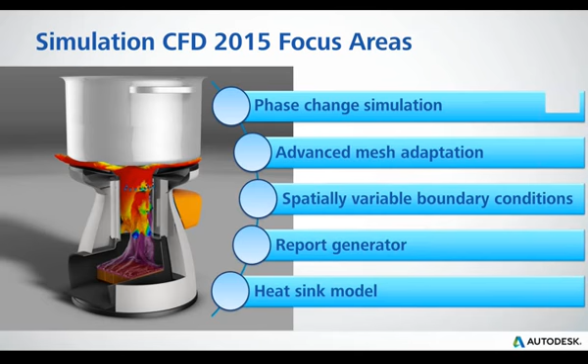Let's talk about phase change. Phase change is an extension, or one piece, of what I would call multi-phase. If you look at current 2014 capabilities, what we had was cavitation, humidity, steam, so the ability to do basically superheated steam, and free surface. We also had some extensions for particle tracking and erosion, but that was most of what we could do when it comes to multi-phase.

For Sim CFD 2015, what we added was the ability to do liquid-gas phase change simulation. That means the ability to take boiling, the effect of going from a subcooled liquid to a saturated vapor all the way to superheated in one analysis, with boiling, and take into account the different thermal and flow effects that phase change would have. We make it available for water, ammonia, R134A, and other common refrigerants, but it's adaptable so you can add your own custom blends if you have a refrigerant that's not in the stock database.

So the target applications we see are phase change, heat exchangers, and radiators. Basically anything where you have flow going through—I wouldn't consider anything like natural convection. You're actually forcing flow and using that refrigerant's high heat transfer capabilities while it's in a saturated vapor state to move heat off of a device. Those are the common applications.

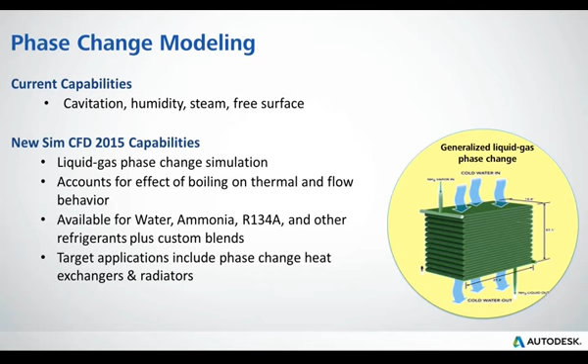So think about, from an electronic standpoint, IGBTs or other high-output electronics. You might have a cold plate and run a refrigerant through there; you're probably going to want it to stay in its saturated phase so it can have a really high amount of heat removal. That's really what this is designed for, to show you an accurate depiction of heat transfer and pressure drop.

So just another way to show what I just talked about, but what I like to say is that the physics are actually pretty complex. We're taking into account the nucleate boiling that happens between the walls of passages. There's some pretty sophisticated stuff going on, but it doesn't require a lot of setup knowledge from the user. It's really just flipping a switch and making sure you put the right reference properties of the material, like what pressure it's operating at.

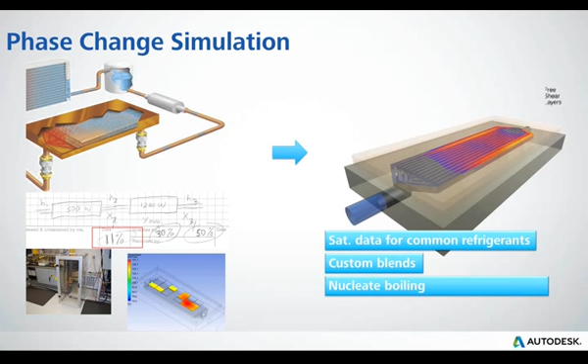For mesh adaptation, we included some new extensions, adding free shear layers, compressible shocks, and heat-producing parts. We've had mesh adaptation since 2013, and I think the way the user should really look at mesh adaptation is as an easy way to answer that age-old question: is my mesh good enough? Do I have enough mesh to be mesh independent? Is my answer, based on the inputs, independent of the mesh? That's what mesh adaptation is really built for, to get as accurate a solution as you can. The only other uncertainties you have then are: are my material properties right, and do I have the boundary conditions modeled correctly? The mesh should be kind of taken out of the equation at that point.

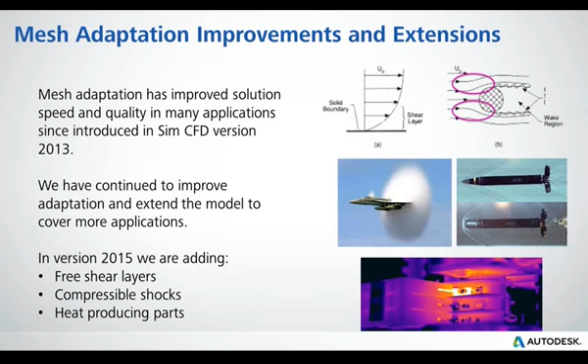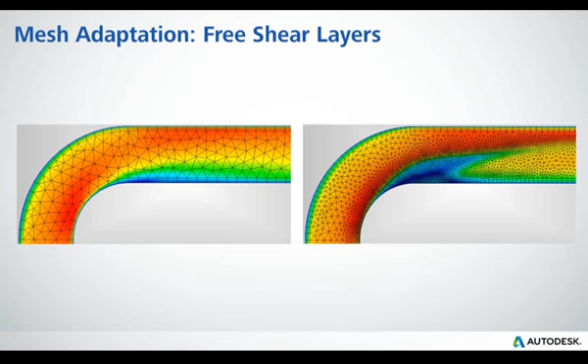So what does it look like? For free shear layers on the left, I like to use simple representations - on the left is just a pipe bend, and the transition from red to green is basically where the flow is separating and wanting to recirculate. On the right, after you go through mesh adaptation, you can see all the mesh concentrated, really capturing that separation accurately without any user intervention. The software is doing it for you, and it's not just going to overmesh the entire model. Mesh adaptation will add some mesh count, but it's going to add it where it's needed and not where it's not - that's the whole goal. So again, there's that area where you see a real crisp location of elements in order to capture that separating behavior.

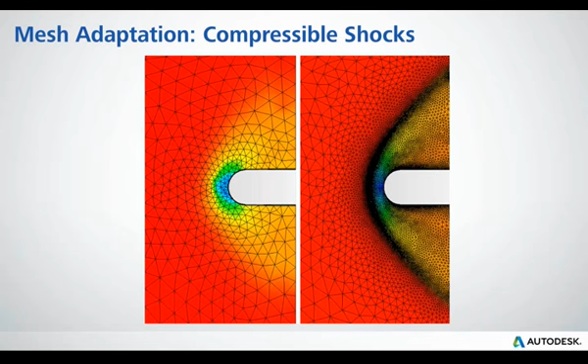Compressible shocks is another extension to this tool. On the left, default mesh, you might not capture the shock very well. You might, but if you wanted to without that mesh adaptation, you're probably going to overmesh the entire model. Here on the right, this is really fine detail of where the mesh is right at the shock layer, and we can see that it's not overmeshed for the rest of the model. So again, a way to get an efficient, mesh independent result, and this would be more useful probably for external aerodynamics type of problems.

So there's a quick video showing the solution progress as you go through the mesh adaptation. I'll probably just replay that so you can get an idea. You get a default mesh with a general good view, then go through a couple of mesh adaptations, and you get a real crisp shock wave there.

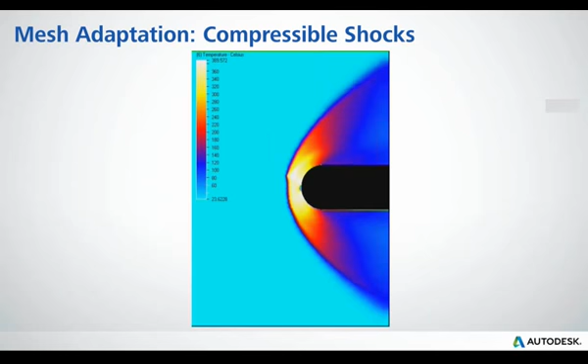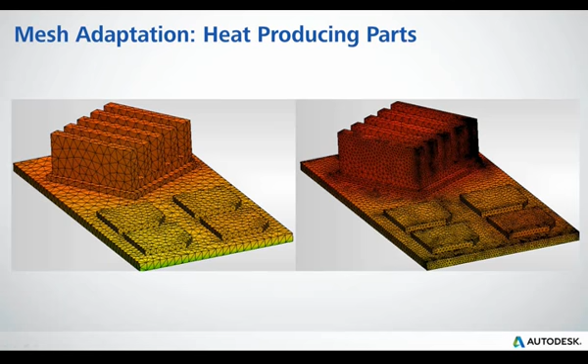It also includes heat-producing parts. Hope this isn't misleading - it doesn't mean that it only adapts on heat-producing parts. Just if you have some kind of heat introduction in the model, it will turn on this portion of mesh adaptation, and give you, like you would see here, where there's high amounts of heat flux leaving a surface or high temperature gradients, more mesh there, so you know that your temperature gradients and heat flux removals on surfaces are going to be as accurate as they possibly can.

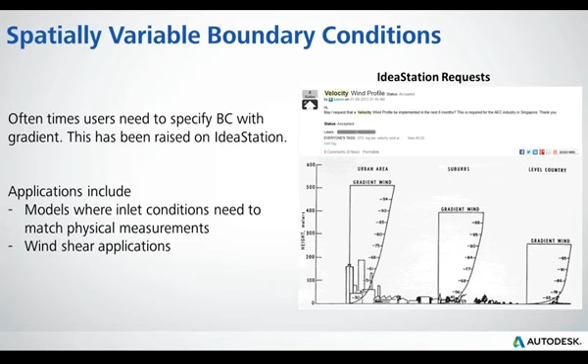So next step is spatially variable boundary conditions. In the past, if you needed a varying velocity at an inlet, you basically had to subdivide that inlet. It's not a really efficient way of doing analysis, and users were letting us know that. The AEC industry in particular needed to say, okay, if I'm in an urban area or in level country, the subdivision of that inlet or the way the velocity profile needs to be input is different. So now in 2015 we give the ability to match those physical measurements, those wind shear applications, in a really simple interface.

Basically it's the same as putting in a regular velocity, but now you have a table of distance over the actual numbers, with a visual indicator of which direction that distance is going. Pretty simple. If you look at it from a result standpoint, you can visually see what's going on here - it's obviously not constant. If you took an XY plot, for instance, you can see the variation that's occurring there.

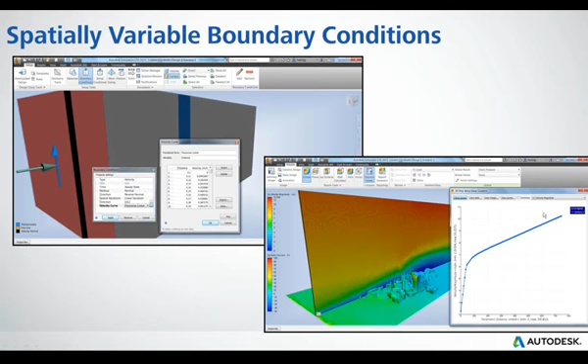A customizable report generator was also asked for. If you're a long-time user of SimCFD back in the CFdesign days, you would have seen maybe an HTML version of the report generator.

Our feedback was that people really weren't using it that much, so we changed some architecture and deprecated it. We got rid of it.

Well, in the preceding years we've had some requests, and over time we saw a higher amount of raised hands saying, hey, we really do need a report generator.

The feedback we got was that it needed to be customizable, so that some guys might want a full-fledged report with all the setup, everything, basically a way to archive how they run a model. And some people might just want the decision center stuff.

I don't want to copy and paste into a PowerPoint, I want it to pull that stuff automatically. So we've made it customizable, where you can just pull whatever you want.

It'll remember those options and puts it into Word, so it's shareable and printable.

Here are just a couple of screen grabs. You can see when you go to the report generator, which is right on the ribbon in the interface in the results section, it'll pop up this screen.

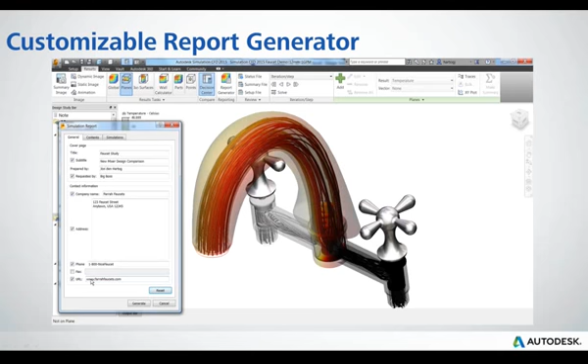It asks what you want to put in for some of your introductory sections, and then what you want to pick out to put in the report. Is it some of the setup, all of the setup? How many types of images do you want? And then which simulations, designs, analyses, or scenarios do you want to include?

So here's kind of what it might look like. It's all hyperlinked. I think it's a very good implementation of what a report generator should be.

I think we'll probably get a lot of feedback, because if the IdeaStation kudos count was any indication, people will start using this pretty often. We'll get some feedback and make improvements as we get more feedback along the year. But that was the report generator.

So this one's pretty big for me. If you look at electronics cooling, one of the larger issues users have had is that when they have a highly detailed heatsink, like the one you see circled in blue, and they don't have just one, they have many.

You start getting to a point where your mesh count gets so high in order to accurately capture it that you might not have the hardware to run it. If you do, the run times are long.

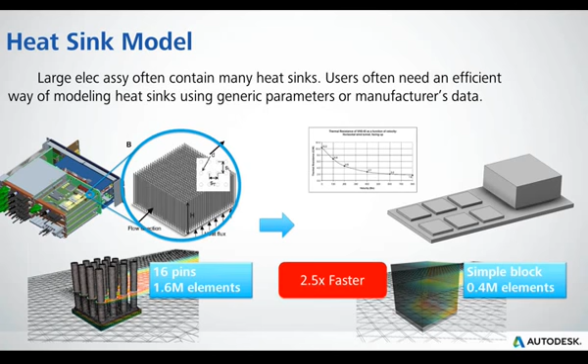So what we've done is take that heatsink that's circled and model it with a simple block, like on the right, to still get accurate flow and thermal results but with much faster run times and much less mesh count requirements. That's what we've added in 2015.

And we did it in a way that's easy for the user to put his heatsink in. Common heatsinks we saw needed were extruded fin, different types of pin heatsinks, and offset strip heatsinks.

And if there's something not in our quick GUI that asks for pin spacing, thickness, and all that kind of stuff — if we don't have something that can accurately represent your heatsink — there's the ability to put in manufacturer's tables.

The manufacturer typically gives an output of flow resistance and thermal resistance, and you can put that directly into the interface regardless of heatsink configuration, so you can accurately represent it with a simple block in CFD.

The only thing you really have to put in, besides characterizing what the geometry would look like if you were to actually physically model it, is an approach surface and a base surface, so it knows where the chip is going to be located underneath it.

So there are two options, and I'll go through both on how to use this. One is quite simple: if your chip is the same size as the heatsink, then model the entire heatsink as one block. That's one way to do it.

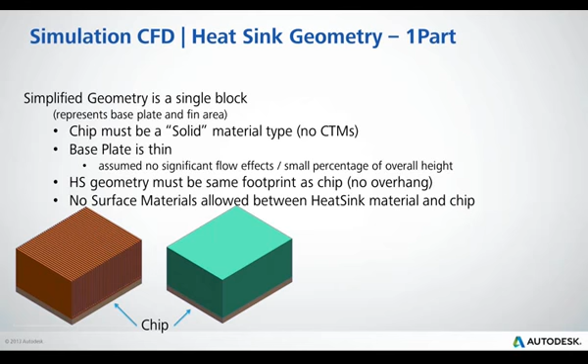I'd say the more flexible way to use this new tool is to do it as two parts. So if you have one chip that's smaller, or multiple chips underneath the heatsink, this is where you'd use this second approach — you model the base plate as a physical solid, and wherever the fins are, you model that as the heatsink material.

Still pretty simple to do, but I'd consider it a two-part subassembly for each of your heatsinks.

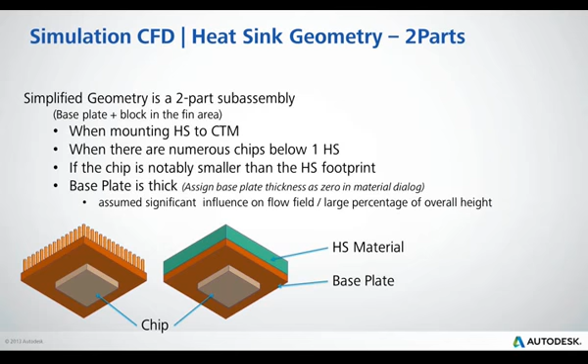This is the approach that I would actually recommend to almost everybody, because of the flexibility that you'll have on further design changes, if you want to add more chips underneath it or stuff like that.

So the setup, just to give you some screen grabs of what it looks like, it's an approach surface. The correlations for heat sinks require you to tell it which direction the flow enters the heat sink. If you have an extruded fin, you need to specify which face the flow enters, and what is the base surface pulling heat off the chips or physical devices. It's a pretty simple setup.

There are some added benefits to doing stuff like this. With any of our materials, you typically get more information from them. If you're looking at fans, it gives you the fan curve. If you're looking at compact thermal models and electronics, you're going to get some information there too.

Here's what a tooltip in the results will give you. It'll tell you first if it's operating within the bounds of the correlations that are doing the calculations in the background, and then give you the thermal resistance, how much heat you're removing with the heat sink, how much heat is going out of the devices underneath through the heat sink, and what kind of air supply it's getting - the temperature and velocity of the air approaching the heat sink.

So I know if I'm starving the heat sink, for instance, or if it has a lot of heat coming off of other devices going through it, and you might want to change your flow patterns.

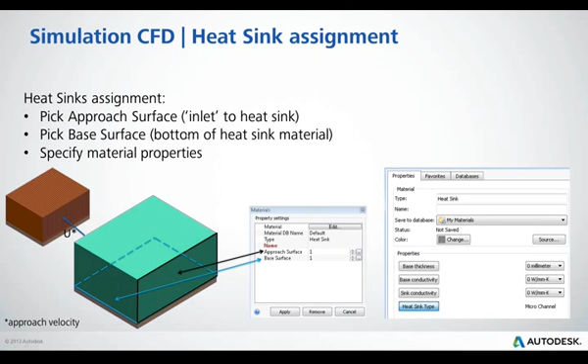So what we have the ability to do when it comes to the heat sinks is, if somebody has the most common type of heat sink, like in our research it was the microchannel, so the extruded fins, pin fins, whether inline or staggered, or even offset strip heat sinks, you can actually in the GUI just type in that type of heat sink. And if you have something that's different, like let's say you have an elliptical fin heat sink, which we don't have in the GUI where you can type in all the parameters...

...of what the elliptical fin heat sink is, you can go to the manufacturer of that heat sink, and they will have a flow resistance and a thermal resistance parameter. You can input that directly into SimCFD in order to then have the proper flow and thermal characteristics that we're calculating with the geometry characterization that you would have in CFD.

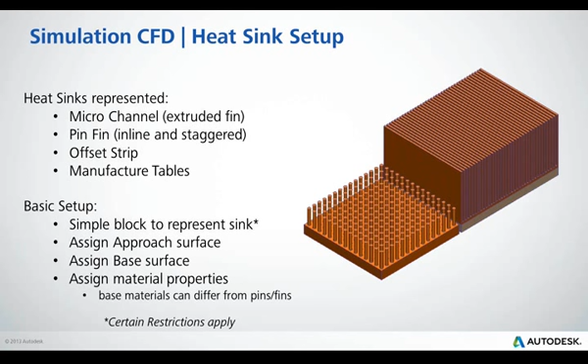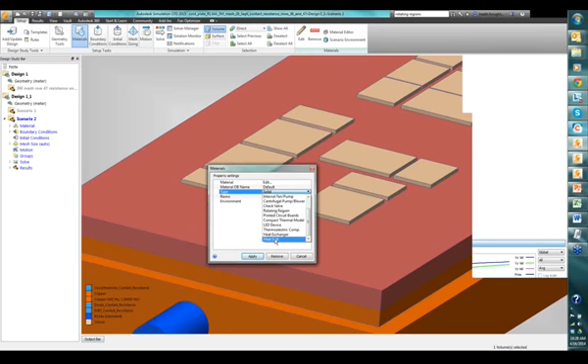So I'll go ahead and pull open CFD. So let's say this is a heat sink - it's not, but let's say this is. If I were to actually look at the model itself, you see one of the new types is heat sink. Go ahead and edit that.

So again, when it comes to these guys, the type would be microchannel, right? So if I go to type, we would type in the thickness and all that. But if I don't want to go microchannel, I would just say heatsink profile, and I'm giving it the approach velocity and the thermal resistance that happens there, and in addition the friction factor. Those are the most common ways that a manufacturer is going to communicate how their heatsink performs.

Does that help? Yep, I think that answers that question. I'm seeing a few on chat. Are you guys - should I just answer those directly, or do you want me to? Yeah, if you see ones in there in the question feed, go ahead and directly answer those. There's quite a few, so I'll try to.

One of the questions on the phase change is, are there any type of blends for gasoline, for liquid to vapor transition? Oh, there's already answers on that, so that's already answered. I didn't notice the answers already being applied. You guys are quick, man. Yeah, the feed, you guys have rolled through it.

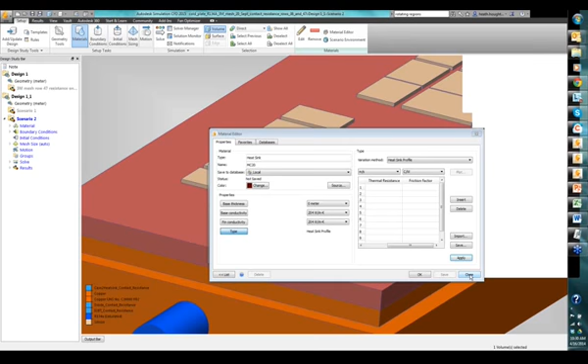So Heath, this is a simple one you can talk about: using mesh adaptation with manually specified mesh sizes. Yeah, so when it comes to mesh adaptation, what it really does is it takes your default mesh - and it's easier to see, this could have been a manually defined mesh, right? It could be auto size, it could be manual, but what mesh adaptation is then going to do is go ahead and adapt beyond that manually specified mesh size, right? So it's going to look at where it needs to be refined.

Does that make sense? Yeah, there's not really an exclusion for that. The only exclusion that we have seen so far is that mesh adaptation doesn't occur in 2D right now. Other than that, I think mesh adaptation is to the point now where we're in year 3 of mesh adaptation, and whatever your physics are, it should be able to give you that mesh independent answer that everybody really craves without having to be a meshing expert.

Heath, can we go back to the user interface and just show where you turn on mesh adaptation? Absolutely. And just so everyone's aware, in terms of limitations of adaptation, it has become very robust in terms of what it supports, but it's only for steady-state simulations, and it doesn't support surface parts. So those are the two big limitations. Yeah, surface parts, yeah.

And again, we're going to be extending these types of analyses as we move on. But at this point, for I would say like 90% of models that aren't transient, mesh adaptation is a great option, especially if you're a little curious, or if you have some really high velocity pressure gradients, recirculation, stuff like that - you want to make sure that's captured. So if you look at your solve dialog, you have your control where you're telling it how many iterations to run and if you want to save stuff and what kind of physics, but you should go right over to the next tab, adaptation.

To enable adaptation, well, I have surface parts in this model, right? So I can't do it. It's going to give you that warning.

But for any other model, I have the ability to do adaptation. I can run as many cycles as I want. In this case, 3 is the default. I wouldn't necessarily recommend going past 3. I don't see a lot of benefit after that, it nails it down so quickly that 3 typically is the sweet spot.

The only other options are save cycles. What that means is, in my scenarios, if I don't save cycles, it'll just run it, remesh it based on the physics and the number of cycles I want, and whatever is saved as the scenario I started from is that final mesh. Now if I want to compare the default mesh to cycle 1, cycle 2, cycle 3, I'll just hit this, and it will add them in as separate scenarios in the decision center as they go.

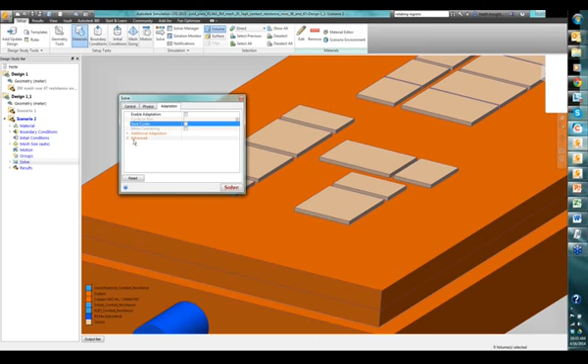This, I'm not actually quite sure, Heath. The IGES translator, I haven't really tried to use it yet in 2015.

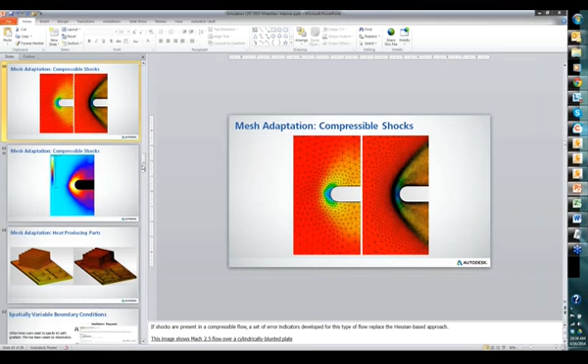Does that support the automatically created volumes? Yeah, so anything should, right? Anything that you have with the new geometry import styles, it should automatically generate the fluid volume if it's a closed volume. So STEP, CATIA, all of them, it should do that. That's part of what happens when we pull in geometry, if we can pull in that format, it happens in the background while it's being pulled in.

And I'm pretty sure we support this now, compact thermal models with adaptation. That works, correct? Yeah. So one of the big drawbacks we had in the past was if I'm doing electronics, now I have to start excluding some of my materials, right? The first year especially, and I think it was unfortunate because it made people kind of turn away from it. So if you had an electronics model with a fan in there, the first year, okay, it can't run. Well now for electronics, really the only exclusion, and Royce was pretty much dead on and I kind of showed it, is if I have a surface part, then it excludes the surface part from mesh adaptation. Now I will say you can typically get around surface parts pretty easily, even in an electronics model, just by adjusting your compact thermal model to include that resistance as part of it.

Does it make sense for me to show maybe some of the results you'd get out of phase change, if anybody's interested? Has anybody asked any questions about that so far? There was a couple of questions in there on phase change. I would definitely encourage it, yeah.

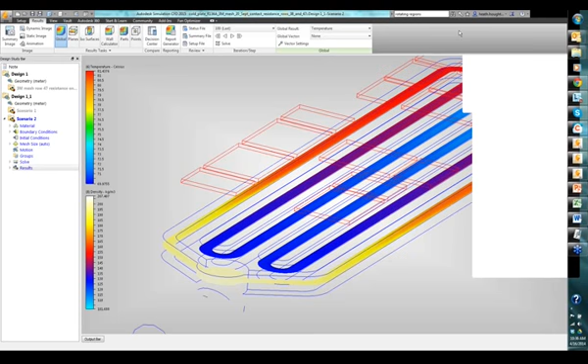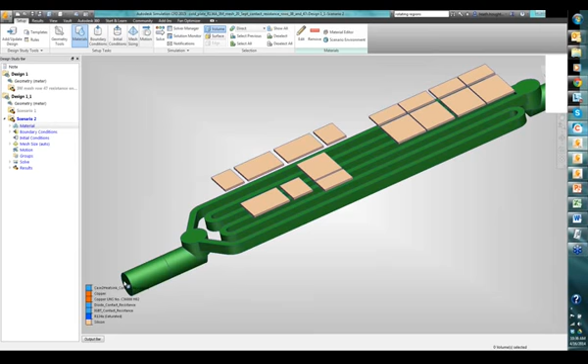So in this case, what I'm looking at is just to give you an idea of the model. This has IGBTs kind of laid out, or high output devices, doesn't matter what they are, and a plate. This is my surface part that I had in the model, that blue one, so I'll hide that, but this is the fluid path. Flow comes in here, it's R134A, so it's actually a refrigerant. It flows through these channels and then goes out the other end.

And if you were to just flow a liquid through here, you get pretty good heat transfer. If you flow a gas, not so good. But if you flow something that's actually in the saturated vapor state, really high heat transfer. And the setup's pretty simple, I kind of flew through it because I anticipated getting a short demo of this.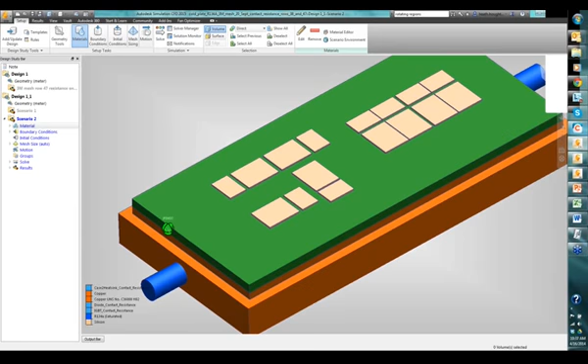From a material standpoint, it's just one of our materials, and if it says saturated, then you know that's one of our refrigerants that we have in the database. So this is R134A. The only real thing I have to do here is make sure that when I'm in my scenario, I actually get my scenario environment reference at the right pressure.

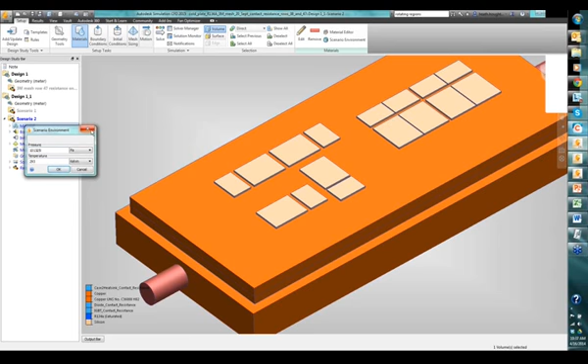So that's the pressure that this fluid is going to be interacting with, if it's looking at the scenario pressure, right? In this case, if I look at its material environment reference, it's not using the environment, it's actually using its own, that's the saturated pressure I'm looking at. That's the only thing you have to make sure of: for whatever fluid I choose, if it's looking at the scenario environment, that I have the right pressure, and if it's using its own individual reference pressure, that we put that pressure in properly.

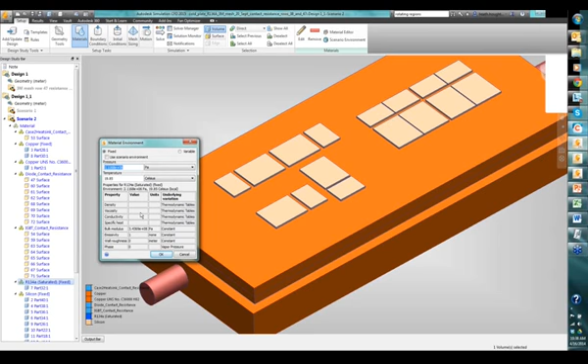That's the only hang-up I would typically see a user that wants to do the phase change go through. After that, we're entering in the flow rate, the temperature, obviously because it is a thermal problem, and then the quality. So if it's a quality of 0, that's right at that saturated phase. If it's a quality of 1, talking about going into superheat. So typically it's going to be entering in somewhere in between.

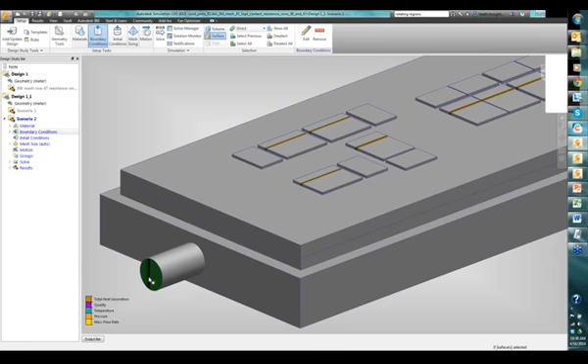And there you go, so that's materials and boundary conditions. From a solving standpoint, on the physics side, you just need to make sure you turn it on. So turn on quality, right? Because we're looking at the quality of the fluid as it goes through.

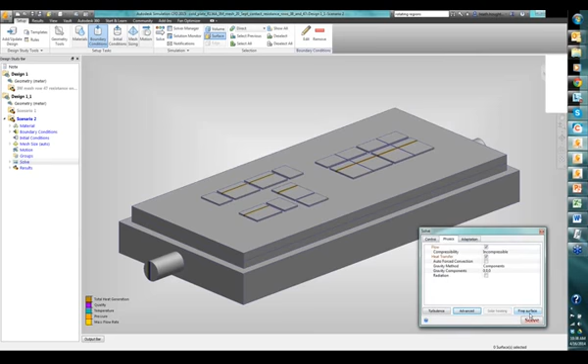So what does it look like in results? What kind of things can you look at? There's a ton of things here. The main thing I would emphasize is that if you look at this graph, you can see that it's coming in as a quality 0.5 saturated refrigerant, and it's actually exiting at a much lower density. That's because the quality is changing.

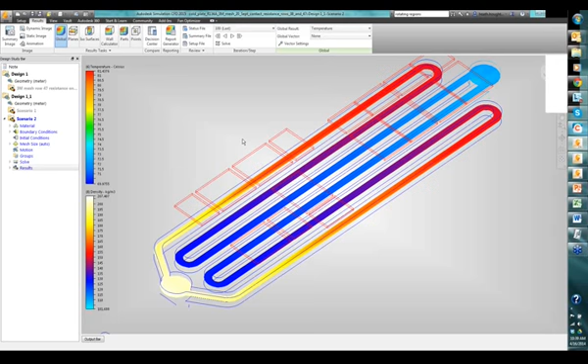It's becoming more vapor. If I quickly make a change, we can go ahead and look at that result here. So let's look at what is the quality. Scalar variable is how we track quality. So you can see again 0.5, and actually on this one, if I look at that, it's actually a quality of 1. That means it's actually driving into superheat.

And if I wanted to see what that really means, look at the temperature. So it's going from the saturated vapor and starting to hit superheat right here, getting out of that isothermal, iso-temperature phase where it's actually driving up in temperature as it goes into superheat.

So you can actually accurately predict that where you couldn't do that in the past. And just as important, our pressure drop is now taking into account all these changes in density and everything, so you're getting an accurate pressure drop as well.

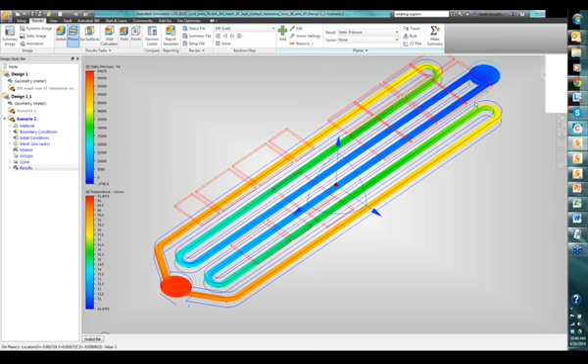Hopefully that makes sense to everybody. It's physics that we haven't tackled before, and we're doing it in a way that there's very little extra effort on the user's part, but getting you the valuable information. So for somebody that's actually designing this, what they're going to try to avoid is what I was showing earlier, which is getting out of the isothermal stage, getting to where your heat transfer is going down, and they'll probably increase the flow rate in this case, or shorten the channels, one of the two, right?

Anyway, Heath, we did get a question on how to define a custom phase change material. So maybe you want to show where those files are. It's not a straightforward process, I'll say that right now, but it is achievable.

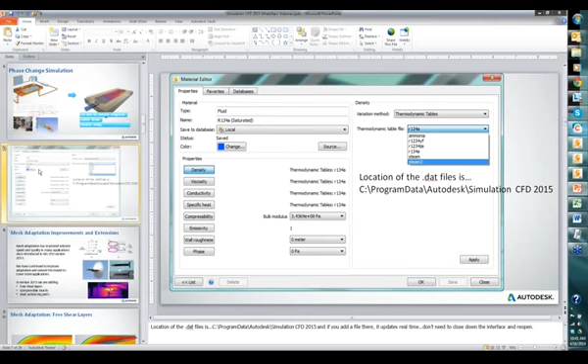So there is, I put it in here. I hid the slide because I thought I might get this question later on. So let me make this bigger. So this is, again, what you would see in the material editor for a typical fluid, right, one that actually exists, and you could actually pull from the thermodynamic tables that exist. So you would see ammonia, a few of the R1s, a few of the refrigerant blends, and steam.

Now they're pointing to thermodynamic tables for density, viscosity, conductivity, specific heat. So not just values, they're actual thermodynamic tables, and where they're located is in your program data, Autodesk Simulation CFD 2015. If you're going to put in a custom blend, I would look at the format of these tables and just put in the properties for the fluid that you're going to use, and make sure that they exist here.

If you make a copy, it will automatically show up in this table file. Even if you're in the software, you close and open this dialog box, if you've made a new one, it will show up, it will be refreshed. So without going into the details of modifying all the properties, you just open up the tables that are in there, make a copy, put your properties in, and it will show up, and then you've got your new material.

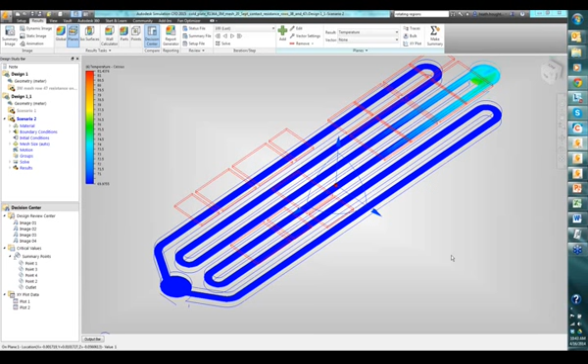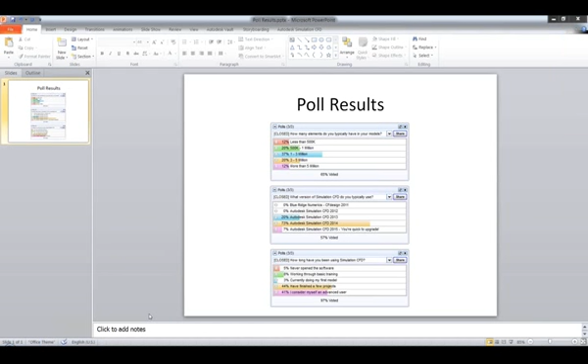I was going to show the results of the polls from earlier. I'm interested, I didn't get to see them. Can you see this now, Heath? Yes, I can. Actually, I found these poll results very interesting. They're basically a perfect bell curve for the size of models most people run. It's definitely centered around 1 to 3 million elements, which is, in my opinion, a great place to be. You can still get good runtime for your simulations. Most everyone's using 2014, which is great, and a few people are still lingering in 2013.

There's probably good reasons why they're still there for those few people. The last question had a lot more this time around on more advanced users, as well as ones that have done a lot of projects but don't think they're power users yet. In previous Hangouts, we've had a lot more on the never-open-the-software, working through basic training models. So this type of Hangout definitely attracted our more seasoned vets. Just wanted to show that to everybody, and I'll pass this back to Heath in case there's something else we want to show live.

Can you leave it there for just a second for me? Yeah, sure. I just commented, I think what we have found, a lot of the reasons that people might stick on 2013 might have been due to some geometry import issues, and I didn't really highlight that for 2015, but we really worked hard on that as well. We had gone through some architecture changes when going from 2013 to 2014 that caused some models not to come through. I would highly encourage guys to just test out 2015 on those same models they might have had issues with, because we're having a hard time finding models that don't come in at this point.